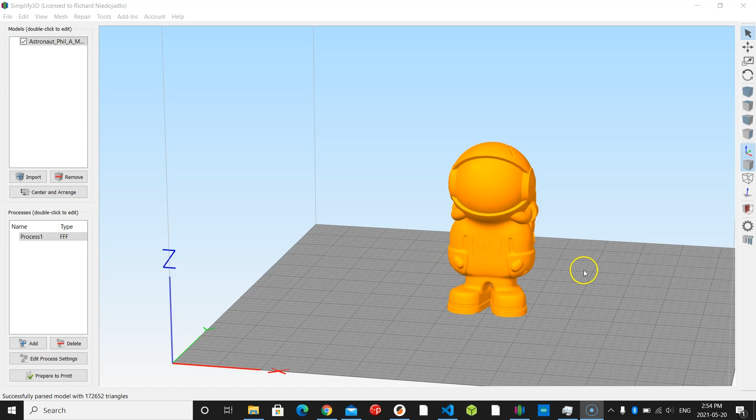Okay guys, so let's go over a few settings here. I'm gonna go ahead and open up Simplify3D. I will kind of explain some of the settings for other slicers as I'm going through Simplify. We've got our MatterHackers astronaut brought in here. It's a very well designed print that deals with overhangs, as you can see, and you print this with no supports. I like to just print these as test prints, hollow, with 2 outer perimeters. Then it'll really show a lot of stuff in there that could be going wrong.

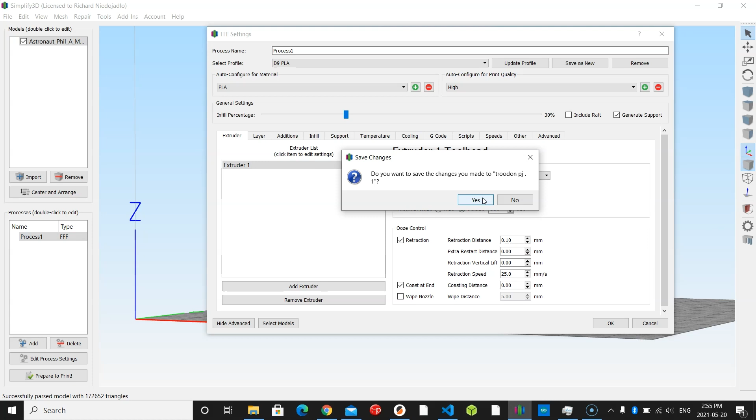So let's go under edit process settings here. I'm gonna switch to a more basic profile here. We'll use, let's say, my D9 profile that I use for other printers as well, like CR-10S Pro V2s, etc., because of the bed size. Pretty generic when it comes to PLA.

Okay, so on your basic Bowden style machine, most Bowden tubes will retract between 5 and 6 millimeters of retraction. If you're getting holes in your prints, in Simplify we have extra restart distance. Vertical retraction lift is something where it'll actually lift up in between its movements and retractions. I don't particularly need it when you're not over extruding.

So the extrusion multiplier here, as you can see highlighted, is called flow rate in Cura. In PrusaSlicer, it'll still be called extrusion multiplier. I find I'm never at 1.0. I find I'm always in and around 0.90 to 0.97. Now that does vary on the filament you're using.

Of course, you're gonna wanna select your nozzle size. You can also use coasting and stuff if you're getting curling, things like that. Also depends on your printer. But basic settings with this, between 0.9 and 1.0 seems to be good for your extrusion multiplier, or in Cura, your flow rate.

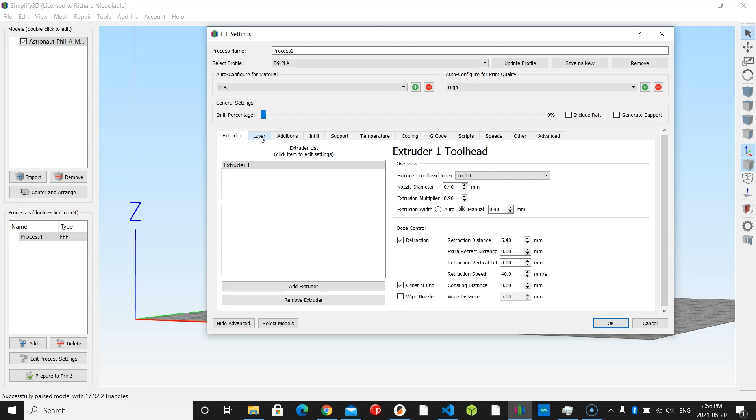Moving on to the layers. Now this is entirely up to you guys. You can use 0.2 layer heights, 0.16 layer heights. You also have the amount of top layers, bottom layers. I leave that up to you guys. I always like to leave my first layer height and width around 100 and 125%. I always slow down my first layer. That's why you can see here the speed's at 50%. That way you get really good layer adhesion.

I always love to use the Optimize for faster printing. It picks a spot. In PrusaSlicer, they've gone so advanced that you can paint in where you want that start and stop point, which is pretty cool. Now, that's basic settings there. Obviously, if you're using vase mode or anything like that, the options are there.

I always do a skirt. I normally do 3, 2.5 millimeters away from the part. Now, if you're using other materials, obviously that can vary. But for the Value PLA, I like to be able to see the skirt. That way, if you're using a BLTouch or an inductive probe, you can baby step or change your Z offset in the beginning of your print, which is really nice. Again, infill, very basic. For test prints with these, I leave it hollow.

These ones were done by Mr. Lee here in the shop. He did them at 5% infill, 3 perimeters, and he did 215. Now I find this filament can be printed anywhere from 195 to 215. You can actually kind of start to play with the finishes due to the temperature.

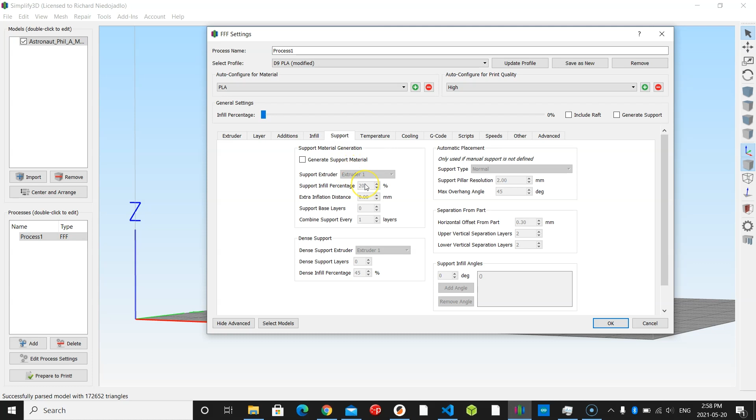So we'll go ahead and move on to the next part, which is support. On a MatterHackers Astronaut, there's no need for it. It's a test print to test for overhangs and things like that. So we don't need it. You guys can always enable supports for your prints. Your support percentage, that's entirely up to you.

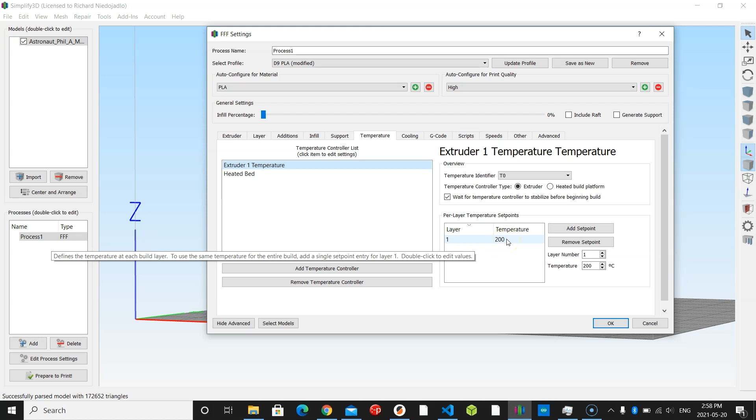Now, back into the temperature thing. With PLA, I haven't ever varied off of using a bed temp of 60 to 50. Always seems to be good. And then again, in your temperature setting, I personally print this PLA at 200. Lee, on his printers, he's doing it at 215, so it can handle a little bit more temperature if need be due to your printer.

Cooling, always with PLA, I never even think about that one. After the first layer, I go ahead and I run 100% fan. Now the G-code, this is entirely up to your printer. So, you know, the size, your offsets, things like that, you can have those all set up in the slicer. That's entirely up to you there. And then your scripts, again, it's entirely up to your printer.

Speeds, I find this stuff works great. I've printed it at home on my Ender 3 that's fully upgraded with our Micro Swiss linear rail, as well as the linear rail kit we carry here, and it prints really fast, tuned up on Klipper. I think I printed this stuff at around 160 millimeters a second before I really started to see fatigue. Now again, that's depending on the part. So your speeds, I leave that up to you.

If you want to get a good print, you go around 60 to 80 millimeters a second. Depending on the detail, you can always bump down into the 40s. I do recommend for detailed prints slowing down. I find you'll get a lot better results. If you want to get something that's simple to print out quick, you can also ramp up those speeds. But I find this stuff works well between 60 and 80.

This is nothing concerning the filament other than obviously the price, if you wanted to go ahead and input any of those values, as well as the diameter, that is definitely important. Now advanced, this is where you can add things in. Now this is neat in Simplify3D. You can actually allow gap fill, so it'll fill in between your outer lines. Now if you want a clean part, I go ahead and switch that to allow single extrusion. Again, that's entirely up to you and what you are printing.

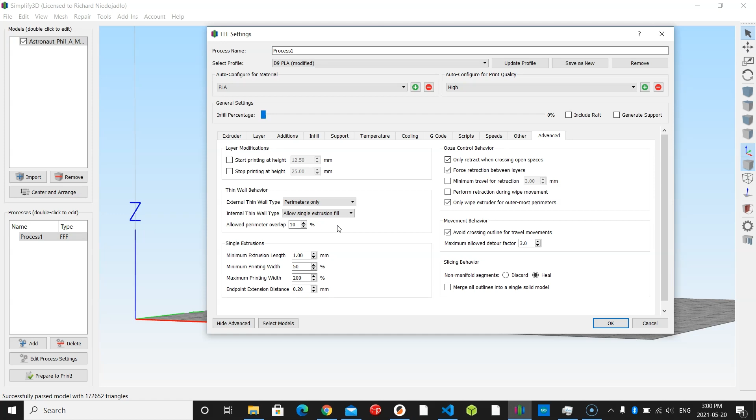So now that we're back at the main page, we've got our astronaut. This is just for some people maybe using Simplify, not just to do with our Value PLA. It's really easy. You just go ahead, you hit prepare to print. It'll compile your STL, your G-code for you, and then you just go ahead and save. Now, if you've got your card plugged in, you can pick your destination. I'm assuming all you guys will already know how to do that. With that being said, I hope all this information was helpful.